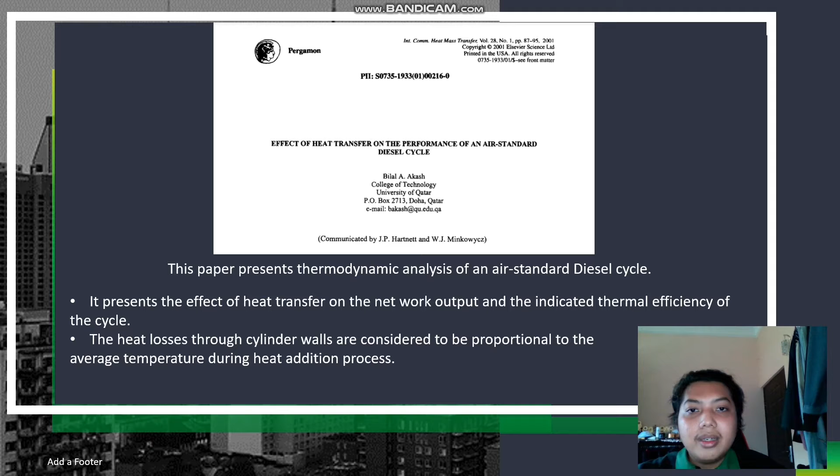So what is the diesel cycle? The diesel cycle was found by Rudolf Christian Diesel, and the diesel itself was named after him. The diesel cycle is a combustion process of a reciprocating internal combustion engine.

Fuel is ignited by heat generated during the compression of air in the combustion chamber, into which fuel is then injected. This is in contrast to igniting the fuel-air mixture with a spark plug, as in the Otto cycle engine.

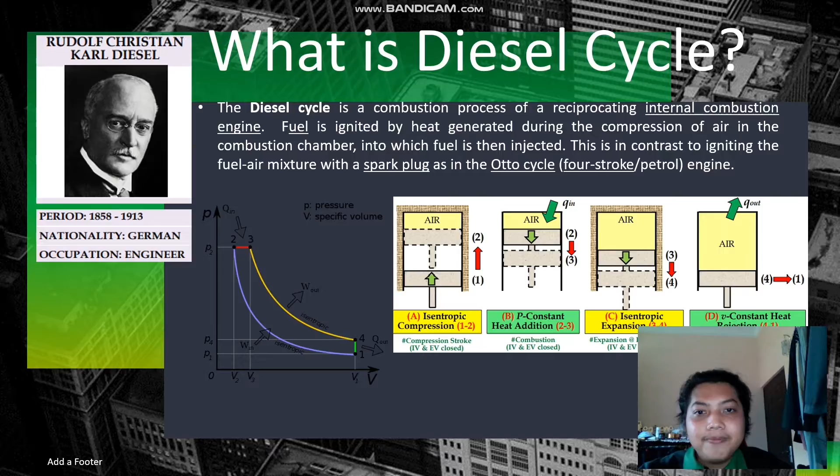The pressure and temperature will also increase. For the position of the piston, it starts from BDC to TDC. Okay, the second process is P constant heat addition. This is because during the heat addition process, the pressure is constant, where P2 equals P3, and we have a heat addition process that is represented by Q in. We also have an expansion process because during this heat addition process, at the same time the piston will move downward for the expansion. Due to the increase of pressure and temperature, the air will also expand.

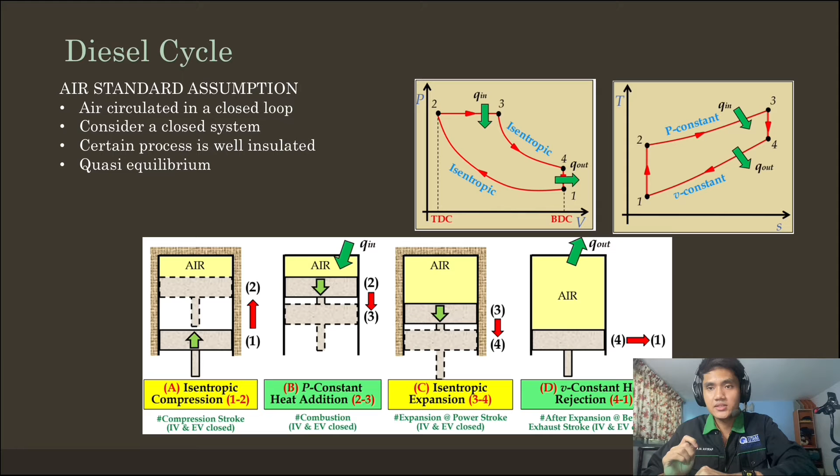Okay, the third process is called isentropic expansion. During this process, the value of S3 is equal to S4, and the piston will still move downward for the expansion process, which it will move from TDC to BDC. The volume will increase. Okay, the final process is V constant heat rejection. During this process, the piston doesn't move and the volume is constant. Because it has a Q out heat rejection to the surroundings, the temperature will decrease and the pressure will also decrease. Okay, I think that's all from me.

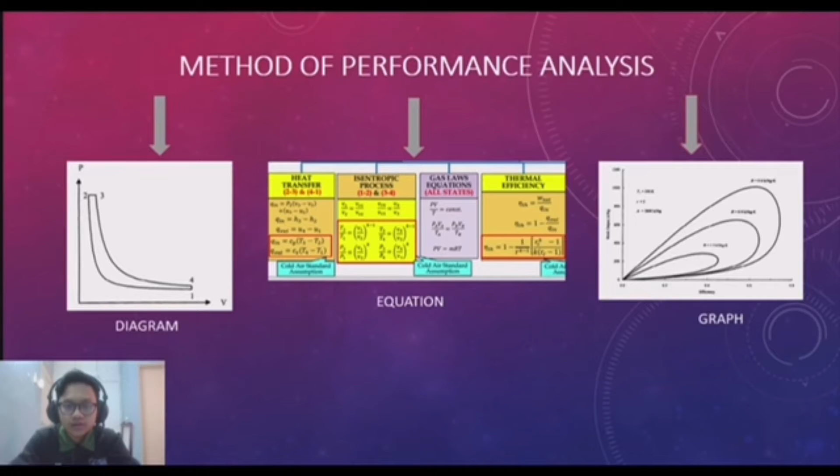B0420200027. Okay, for my part, I will explain about the method of performance analysis in this journal. As we can see from the slide, there are three methods of performance analysis that were used in this journal, which are diagram, equation and graph. For diagram, the PV diagram for the thermodynamic process performed by an ideal air standard diesel cycle was sketched to determine the process involved in the ideal air standard diesel cycle. Process 1 to 2 is isentropic compression. Process 2 to 3 is heat addition at a constant pressure. Process 3 to 4 is isentropic expansion, and finally process 4 to 1 is heat rejection at a constant volume.

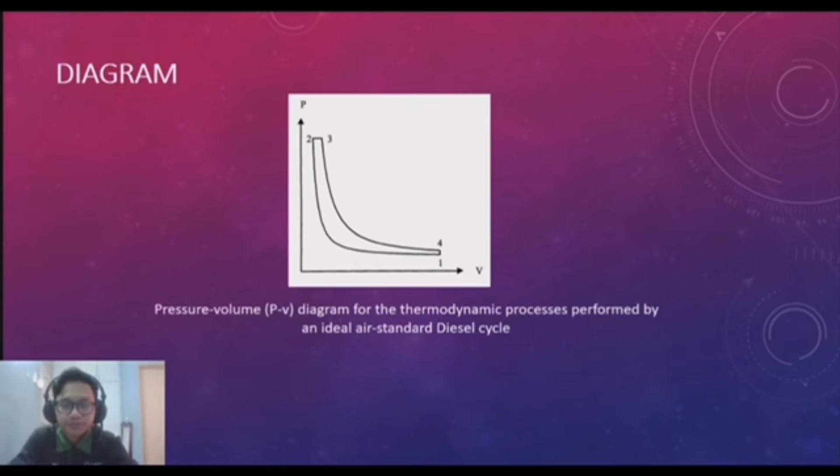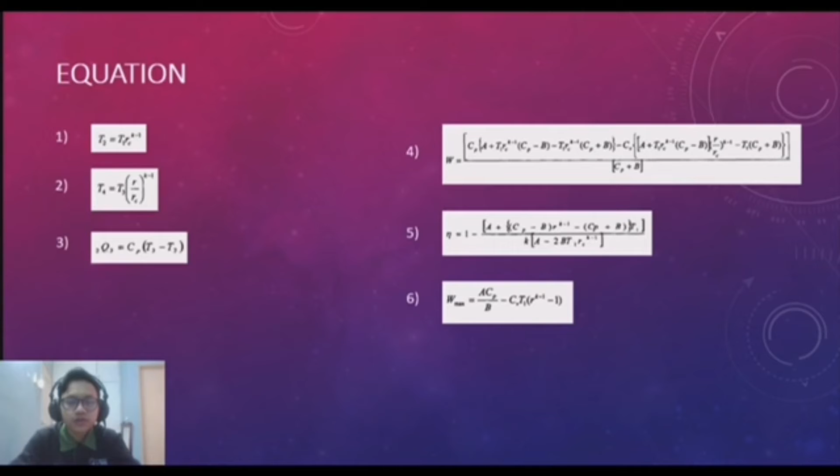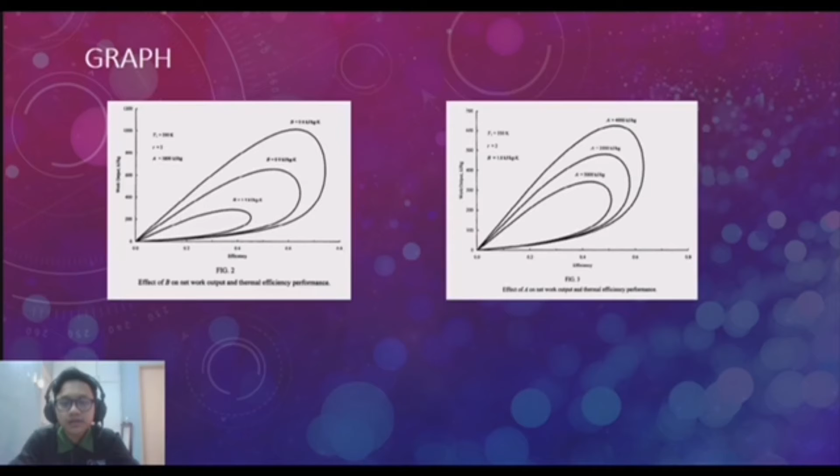Lastly, for the graph, after the data were collected by using the equations that I mentioned before, the graphs were plotted. There are two graphs plotted in this journal. The first graph is plotted to determine the effect of B on net work output and thermal efficiency performance, and the second graph is plotted to determine the effect of A on net work output and thermal efficiency performance. That's all for my part.

Thank you. Now I will emphasize more on the calculation used in the journal paper. The condition used in this journal paper is constant specific heat, so we didn't have to refer to the ideal gas table of air. So the first calculation is the work output per unit mass, which is W equals Cp, or constant pressure, times T3 minus T2, minus Cv, or constant volume, times T4 minus T1. The second one is the heat addition per unit mass, which is given by Cp, constant pressure, times T3 minus T2.

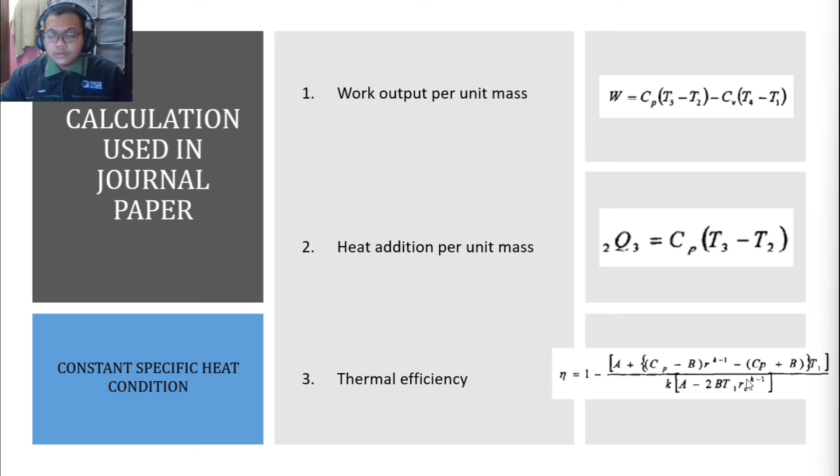To find the absolute temperature, T1 is given in the journal paper. To find T2, we can use the equation T2 equals T1 times Rc, the cutoff ratio, to the power of k minus 1. K is the specific heat ratio, which we can find by dividing Cp by Cv. T4 can be found by the product of T3 times R over Rc to the power of k minus 1. To find the compression ratio, we can use V1 divided by V2, and to find the cutoff ratio, we divide V3 by V2.

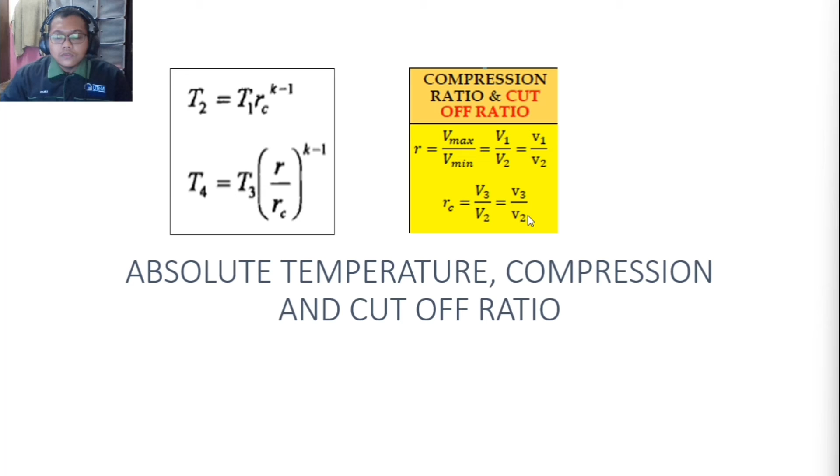In this journal paper, the researcher considers the heat loss in the diesel cycle. So there are two new constants introduced, A and B, which are related to combustion and heat transfer. The modification made to the calculation is during the heat addition, where Cp is replaced by A minus B times T3 plus T2.

So to find T3 from this equation, we derive it into this equation: T3 equals A plus Cp minus B times T2 over Cp plus B. And if we derive further, we get A plus Cp minus B times T1 Rc to the power of k minus 1, divided by Cp plus B.

To find T4 using the constants A and B, the equation will be A plus Cp minus B times T1 Rc to the power of k minus 1 divided by Cp plus B, times R over Rc to the power of k minus 1. So after the constants are replaced in these equations, the work output calculation will also be derived into a much longer equation from these T3 and T4 calculations.

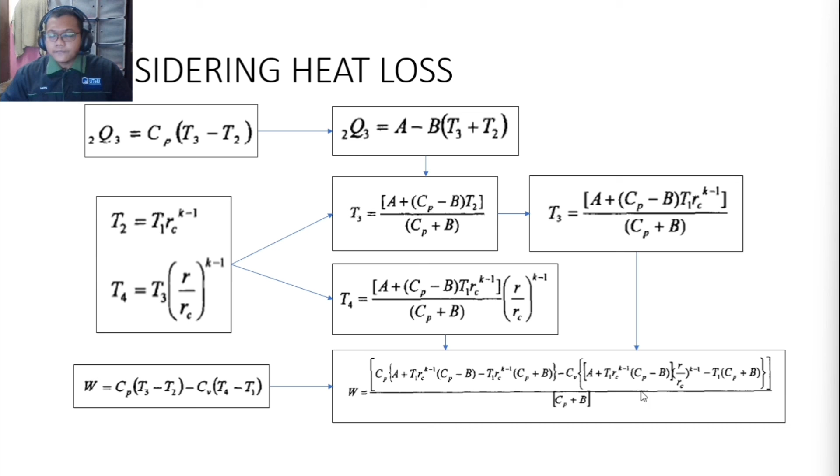So now I would like to discuss the suggestions to increase the performance of the air-standard diesel cycle. The first thing we need to know is that to increase the performance of the air-standard diesel cycle, we have to increase the efficiency of the engine itself. One thing that can be done is a higher compression ratio. Here we are limited by autoignition of the gasoline. That is, if the gasoline engine compression is above about 10.5, unless the octane number of the fuel is high, knocking combustion occurs. This is annoying, and if persistent, damage to the engine will also occur.

Thus, gasoline engines are limited in their efficiency by the inability of the fuel to smoothly burn in high compression ratio engines. However, the diesel engine is not subject to this limitation. It runs at a high compression ratio. In part, this explains its high efficiency. It also runs lean, and its pumping work is low, further increasing its efficiency over the gasoline engine. Humankind needs quiet, smoke-free, and odor-free diesel.

The next one is we need new cycles put into practice, such as the Atkinson cycle. This has a smaller compression ratio than expansion ratio, which means TC is reduced since the burned gases cool as they expand, making the cycle efficient. We throw away less waste heat via the exhaust.

The last one is to run the engine at optimum conditions, meaning low friction and low pumping work. Try to approach the piston engine efficiency of 35%. This is already happening in some stationary piston engines, for example, large slow piston engines used at pipeline compressor stations. This is also an important characteristic of the engine used in hybrid gasoline electric vehicles. Let the gasoline engine in a hybrid gasoline electric power plant only run with good throttle opening and modest RPM.